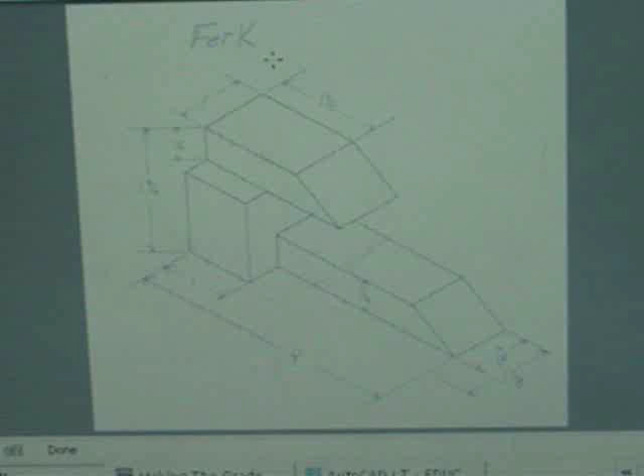We're looking at the fork, and it's a unique drawing because this top piece is 1 inch thick, and the bottom part is only 7/8 of an inch thick. So there's going to be hidden lines in the top view, representing where this piece is underneath this one. Both the top and bottom pieces are all the way to the right along the piece edge, not centered on this part.

So we're going to start off by drawing the front view, which is 4 inches by 2 inches tall.

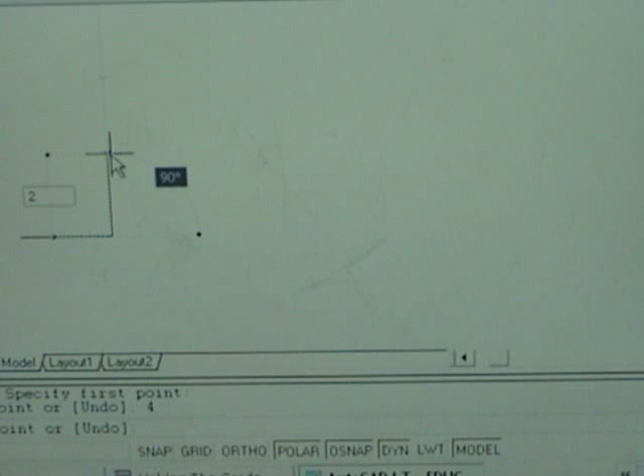So here's the overall size of the box. Now we're going to continually make pieces for that. This top piece comes down a half, and this piece goes up a half and down a half.

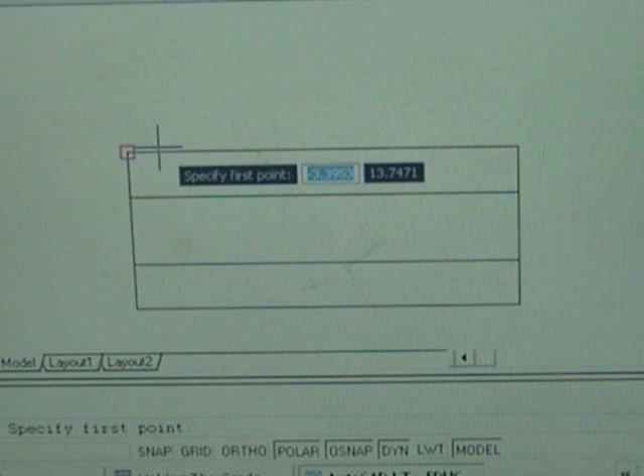It's 1.5 out, so I'm going to go modify offset, 1/2 of an inch down, 1/2 of an inch up. And then if I just draw a line over 1.5 and go down, at this point I've got my overall size and shape of the part.

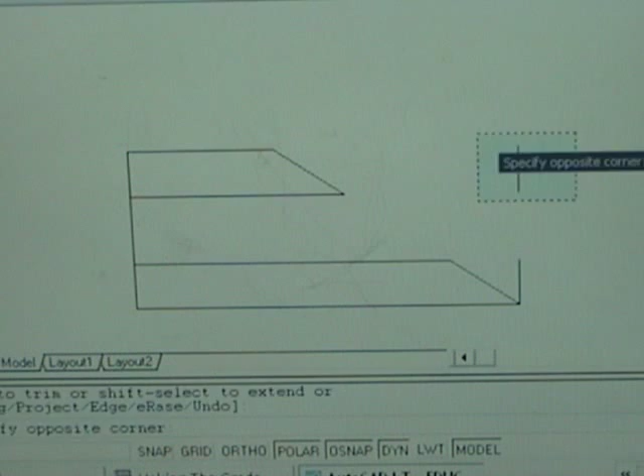I'm going to trim out the parts that I don't need.

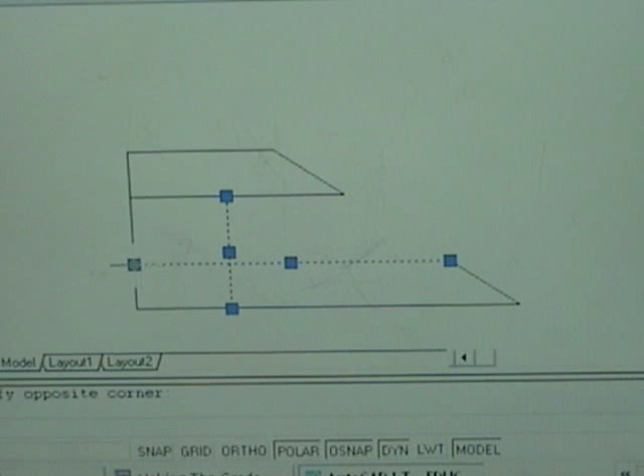The only thing I got to add now is this little square on the middle part, and it is 1 inch wide. So if I come in and go modify offset, come over 1 inch and then bring this one down and this one over, that is the front view of the fork.

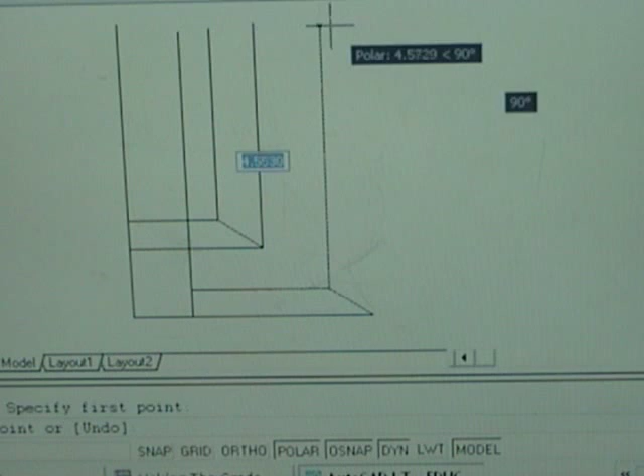Now to get my top view, I'm just going to run all my features up. At this point I can choose any line, go horizontal across it, and then when I look at the drawing, let's see how wide it is. It says that it is 1 3/8 total wide.

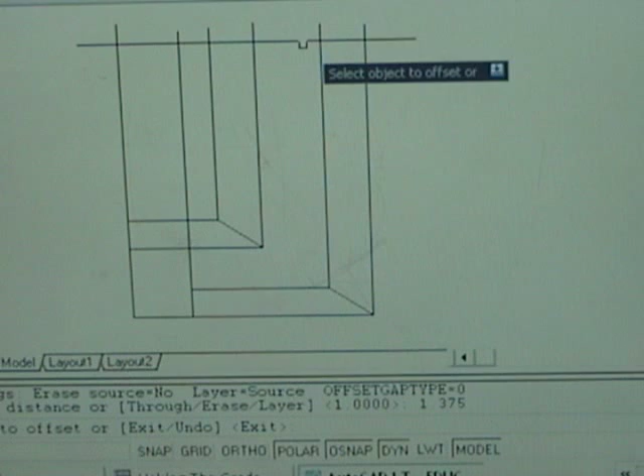So I'm going to modify offset 1 3/8. There's my overall box.

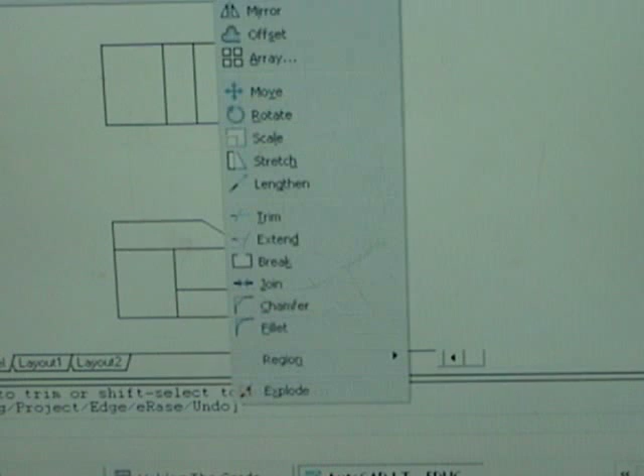And now we have that 1 inch piece and the 7/8 inch piece at top. The top part is 1 inch and this part is 7/8 of an inch. So I'm going to offset those two lines. Modify offset 1, enter, and modify offset 7/8, enter.

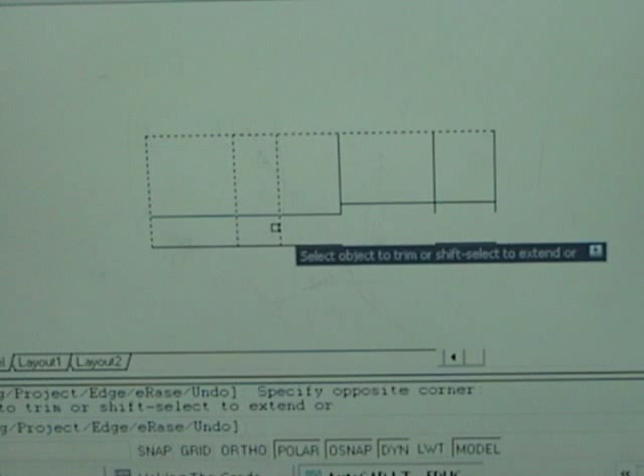And then start to trim out again. The bottom one was 7/8. All I'm doing is trimming out some lines. I can bump these up.

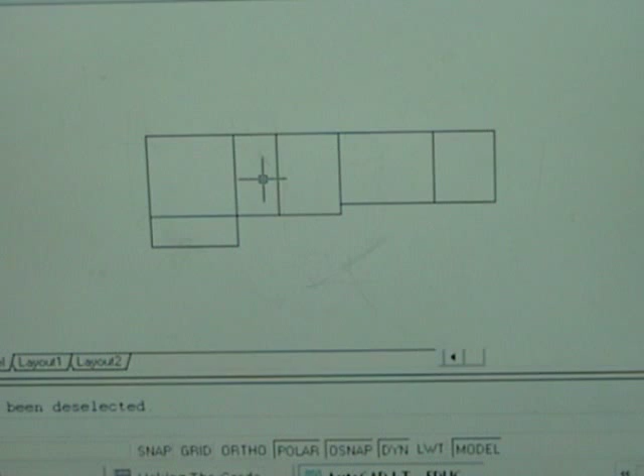Now at this point we got to throw in a couple hidden lines. This one here does not go all the way through because it is a hidden line. We've got hidden lines in this area right here. So I'm going to go ahead and change my lines to red.

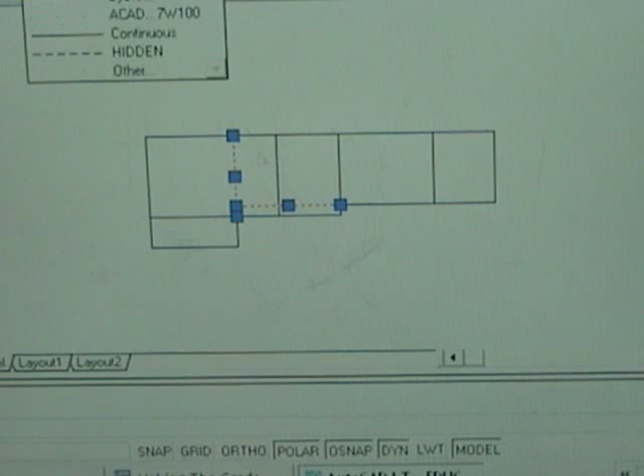So I'm going to draw a line from here up and this line over, and I do have to change those to hidden lines by going to this spot here and changing them to hidden. If the hidden line does not show up, you have to load and find the word hidden. Any of the three will work, hit OK.

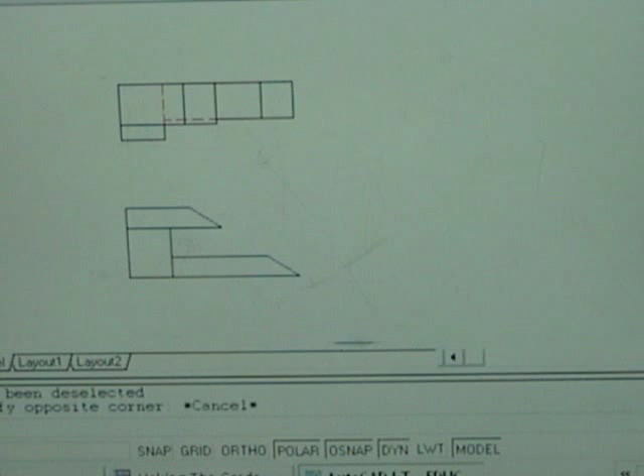So now my top view and my front view are complete. Now I've got to get the right side view. I need to go from the hypothetical upper right hand corner of the part with a 45-degree angle, shift comma.

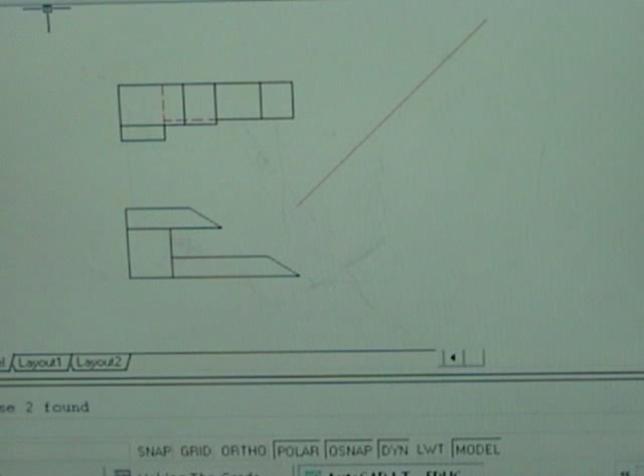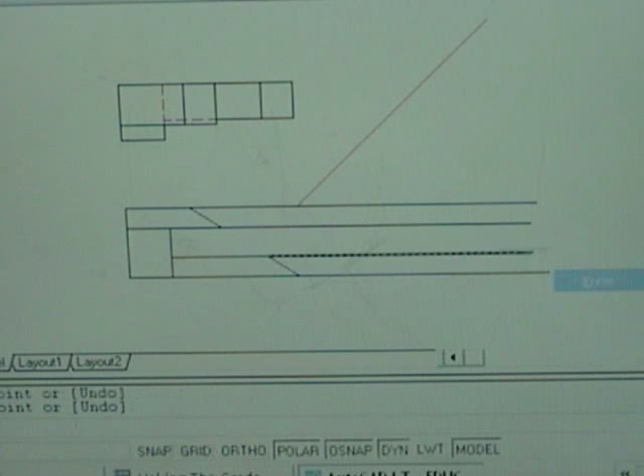Alright, now we're going to transfer features over. So the top view all goes across, all 4 of these features. And then once again we get all of the horizontal ones across.

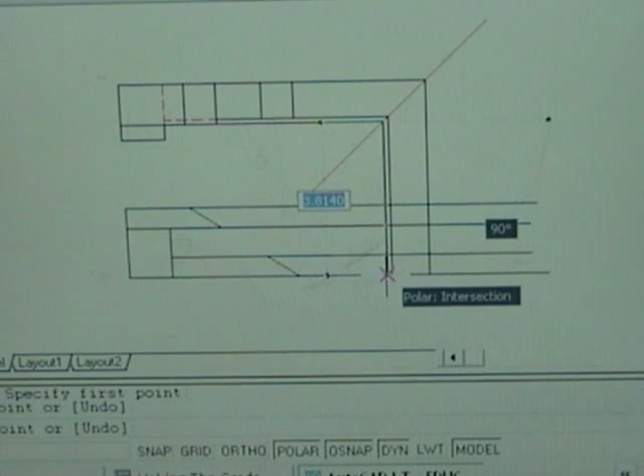If it doesn't give you that polar intersection there, go down and turn your polar on at the bottom of the screen. Over and down. Over and down. And the last one, over and down.

I now have everything that I need in order to finish my right side view. Just got to think about what I see. The top part was 1 inch. The bottom part was 7/8 of an inch.

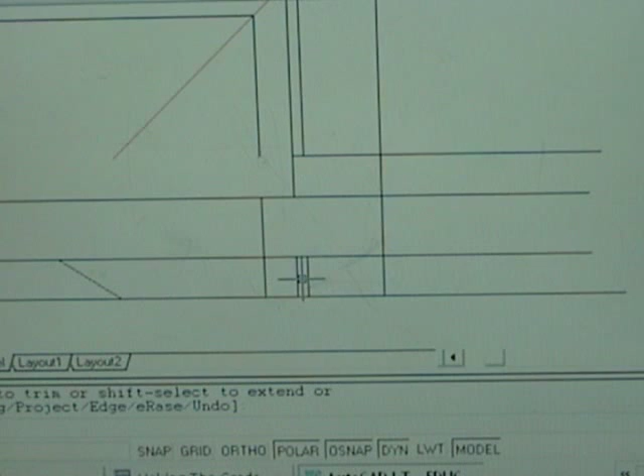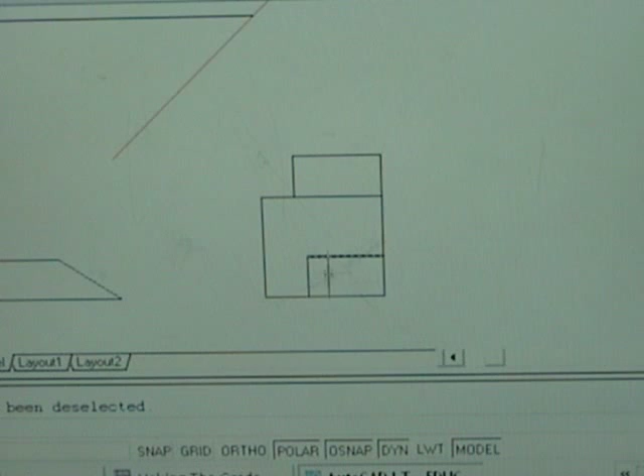So I'm erasing some things out, a little modified trim now. The last thing is this piece there will be bumped over. Now I've got my 1 inch piece on the top, my 7/8 piece in the bottom, and the L piece. So this piece is basically drawn correctly.

We have a 7 out of 10 right now. And now I need to dimension it.

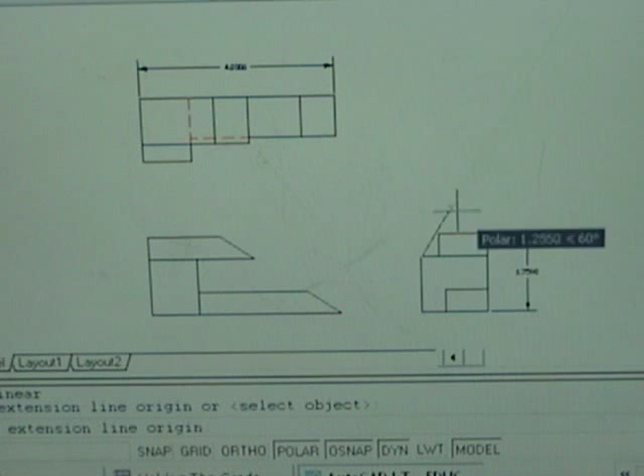So first off, let's start off with the overall thickness of it. Overall height of it. And the overall thickness of it, which probably there would be the best spot. So I've got the overall length, width, and height, which always has to be there.

Now we've got to look at individual ones. This piece here is 1 inch. This piece is 7/8. This piece is 1.5. Each one of these was 1/2 of an inch tall.

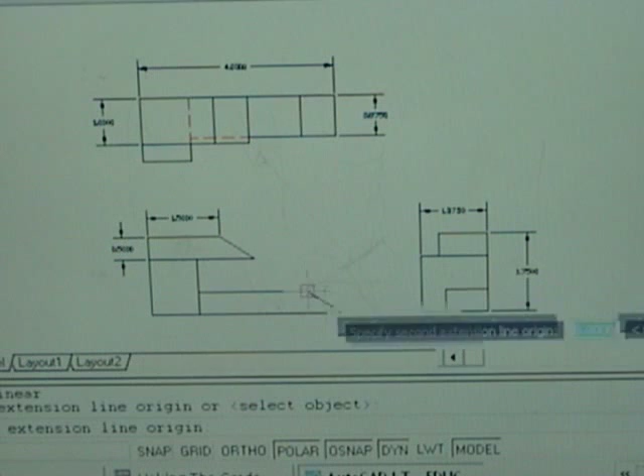So if I look at it, we've got 3 measurements up and down, and I've got 2 of the 3 by going the 2 halves. Going left to right, I've got 1, 2. I don't need to do anything up here because of that angle there when we connected it.

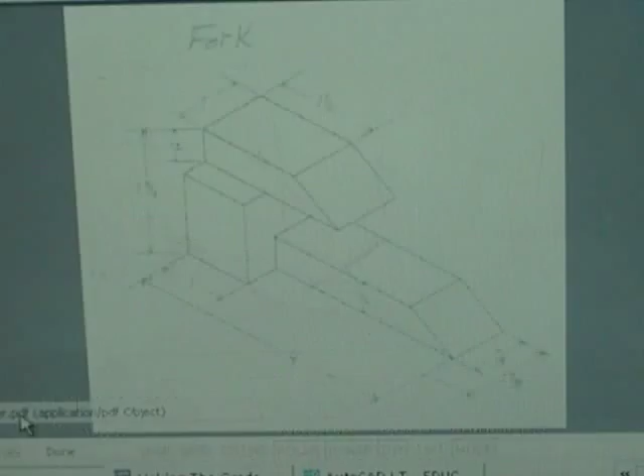And actually, if I just double check and look at the fork over here, if I've got all the measurements that are on this piece here, I ought to be good to go. It looks like I missed that 1 inch one right there. So at this point, I dimension the linear for that 1 inch, and the fork is now completed.